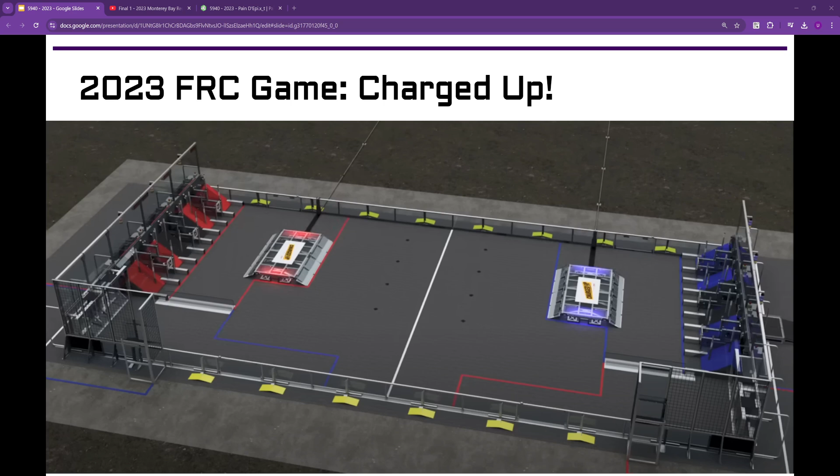Bread had one of the best robots of the year in this game. They are able to play the game in a lot of different ways. And so we'll watch a video, one of their matches, and then we'll look through all of the different mechanisms and see some of the unique ways they were doing things in this game. This is one of the final matches at one of their regionals. I think Bread's down here in the corner for the start for auton.

A little quieter. Yes, they're working with Madtown 1323 to be able to go get game pieces and get them back to the grid. They had an intake that largely for cones they were grabbing from the single feed station, and then able to very quickly extend out and get them onto the posts.

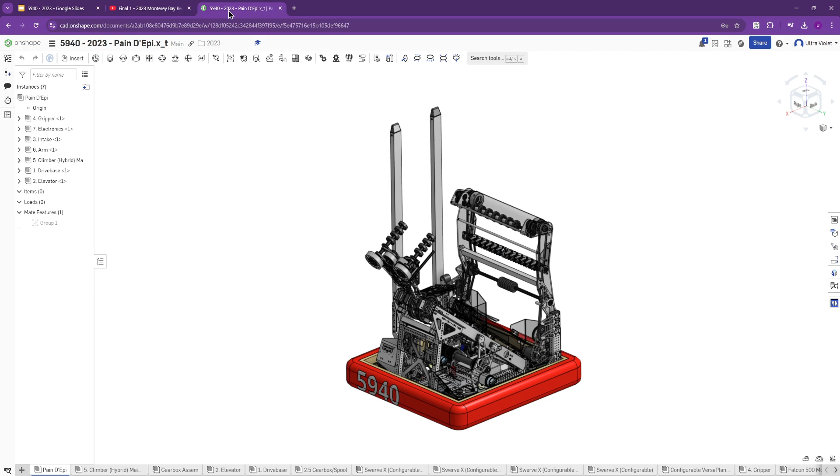So as we look through the robot, it's again going to have a somewhat standard look. And whenever we're coming in and looking at robots, we always kind of break down the mechanisms. They do it in a similar way to what we do. They have numbers and all their mechanisms and things. So they get the drive base here, which we don't have to go too much in detail. We're kind of standardizing in FRC now across drive bases.

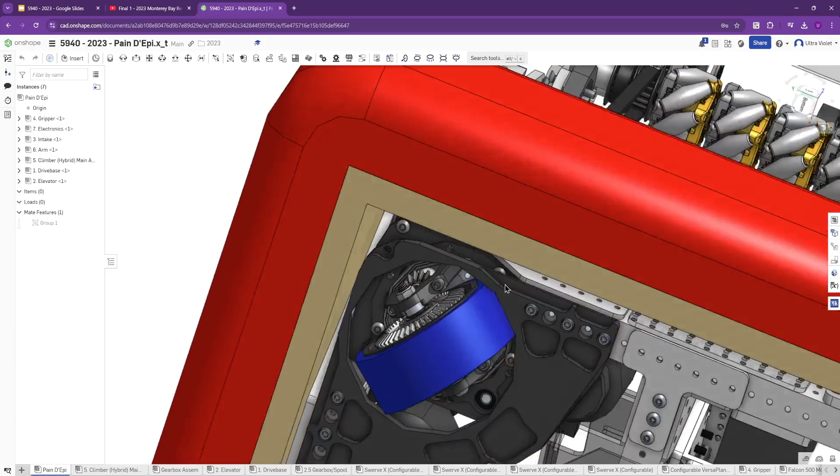There's a lot of little details and things, but for the most part, teams are going to have a rectangle or a square with the swerve modules mounted into the corners. Here they're using the West Coast Products Swerve X modules. So they have a little bit of a different base plate than the Swerve Drive Specialties ones. But for the most part, they're all doing about the same thing. They just do it in a little bit different way. So they have a belt here instead of a gear and a few other things.

But as you look through them, there's more this year than there ever have been in kinds of different types of modules, but it is useful to have an idea of what they are. So as we're scouting and looking at other robots, we know a little bit about what they're doing.

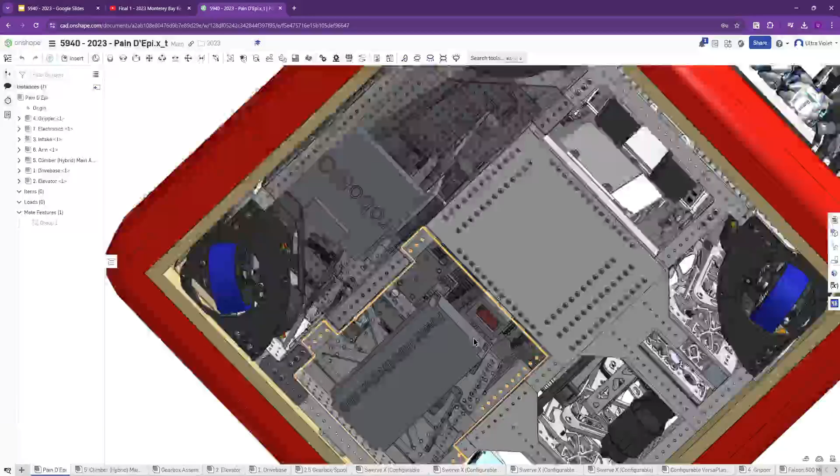The other part of their drivetrain, they do have some undermounted electronics. So we can see that they have some polycarb plates here that they have to take off if they need to get to their RoboRio or their power distribution hub. And that's all that's in CAD, but there may be some other things on the real robot. Whenever you have space like this, there's probably something tucked in there on the real robot that just never got into CAD. It's just room for extra small electronic things, switches like the Ethernet switches or power regulators or anything like that can fit down in there.

Their battery looks like it does mount in from the top, so it is sitting in here, and they have a little bar that the power leads have to go under so it doesn't end up hitting any of this stuff up here that's rotating. And then it gets plugged in here, so they actually have a little 3D printed block to hold the other end of the connector, it looks like.

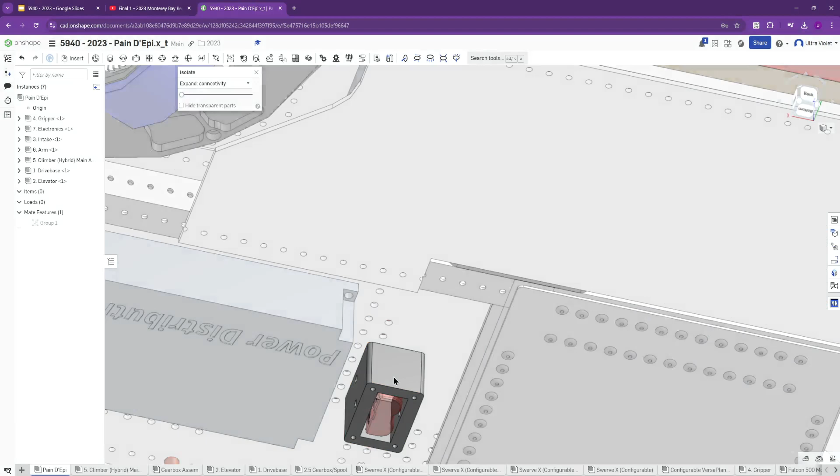So we can kind of see that here. So they have this block here that they're going to bolt through the other end of the connector, so it's stationary to the robot, and then they're just able to plug in on top of that.

And then they have a very short power path. They have the main breakers right here, PDH is right there. So they have very short main power runs, which is really good for efficiency. You're not wasting any of the battery power to resistance that's built into the wire. So you always want to keep that pretty short when possible, and have these three things all pretty close together.

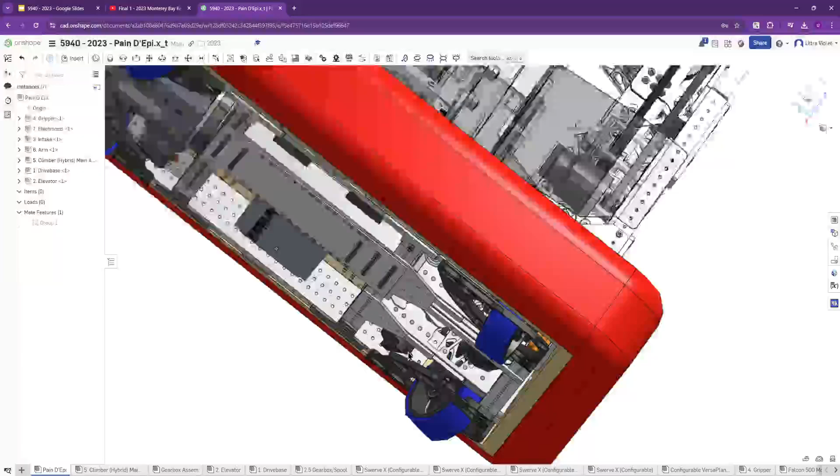Okay, the rest of the drivetrain chassis, we have a few different crossbars here. So you have the main ones that are supporting the main run of the robot, like the elevator mechanism. And then they have these ones out on the side here for the endgame fork climb, where they're able to support themselves on the side of the charge station.

So going up from there, they have that elevator. We'll look at the intake first, actually. Okay, so this was one of the more complicated intakes from this year. It's a slap down style intake, so it starts up and it just has one pivot joint, so it's pretty easy to build. You just have to pivot across this axis and bring it down to be able to go outside the frame perimeter to bring the cube into the robot.

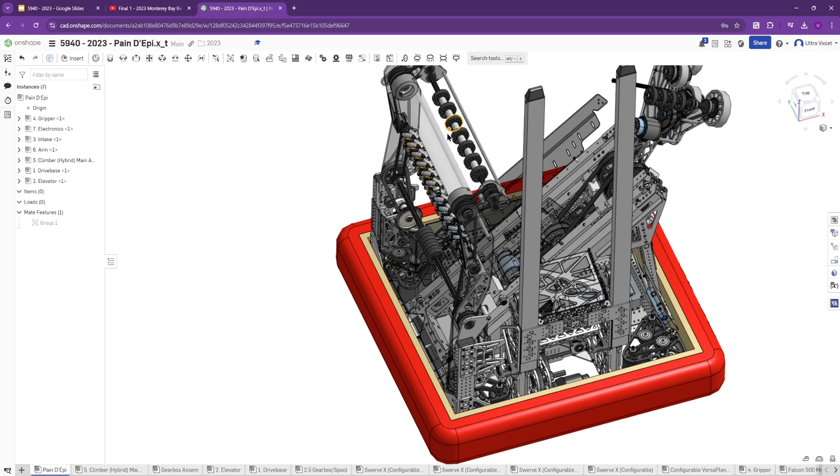But then you also have this extra roller up here, and that's what's used for the cones. So as this comes down for cubes, it's just going to move the cube in, have it hit the bumper. And then these are mecanum wheels. We've talked about them a little bit in a couple of videos this year, but not a ton.

Mecanum wheels are a type of omnidirectional wheel that has the rollers at 45 degrees. And what that lets us do is even though they're just spinning along one axis, like if you just had a normal wheel, they're always just going to push in one direction, it allows the object to be moved to the side as well.

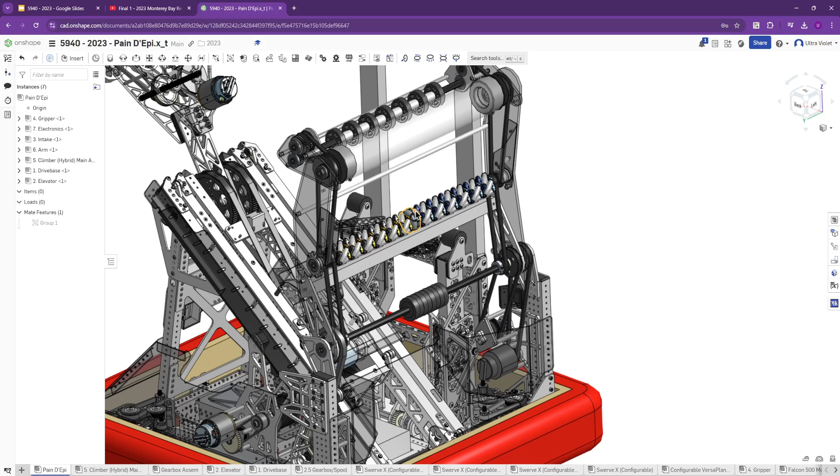So for cubes or balls or anything that can be compliant, as this is rotating and spinning in, the cube runs into these wedges here on the side, and it's contacting these wheels, and it allows it to very quickly slide over to the center and get pushed up with this wheel and this center omni wheel here, and get driven into the claw so it can actually be intaked and taken up to be scored on the higher levels.

So this gets used a good amount in different intakes. It allows you to vector the game piece into the center of the robot. So anytime we need to have a game piece in the center of the robot to score it more precisely, mecanum wheels or vectored intake wheels are always an option. We've run them on a few different past robots. 2014 is one of the first years anyone did, and we developed it and were able to use it for that large ball as well that year.

And then that's just going to go up, and they have to have everything in sync. So as they go into cube intake mode, this arm's going to fold back down, so they're in a certain state that the robot's going to be in to be able to bring that cube in, and then be able to flip it back out when they need to.

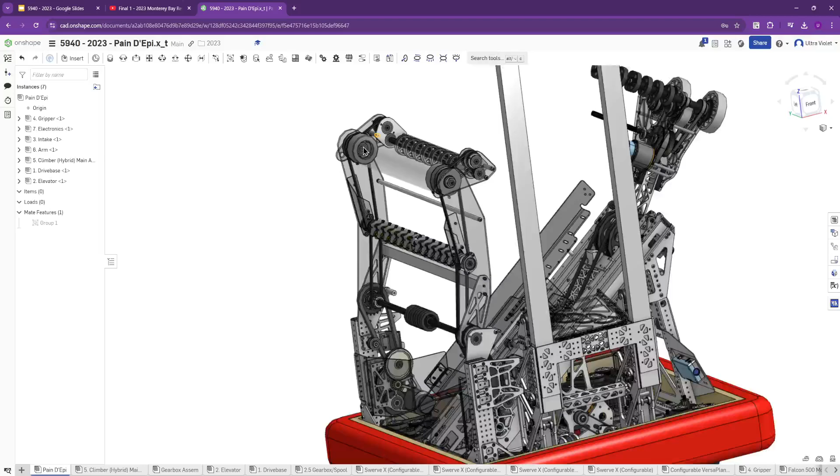For cones, they actually grab cones with them tipped pointing away from them. So the tip of the cone is going to be back over here, and the flange base of the cone is going to be up on the ground facing towards them. They bring this whole arm down, and the flange of the cone gets grabbed between these two rollers. And we can see the powertrain of this whole thing pretty quickly. It just keeps doing that.

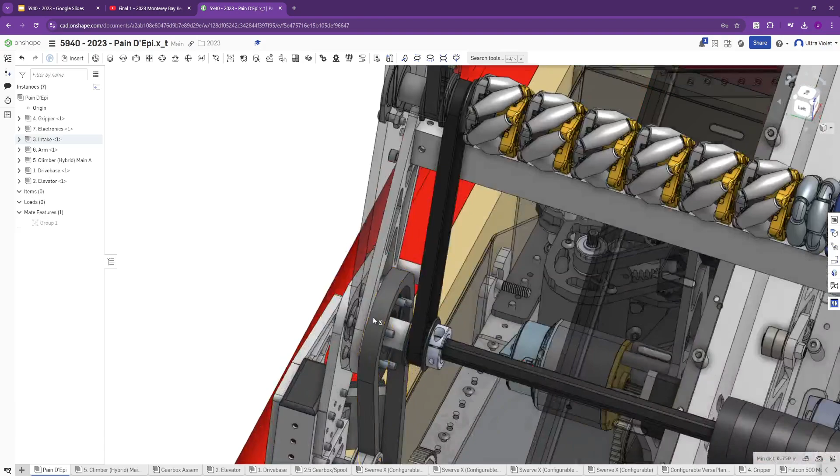Okay, so we have the gearbox here that is driving the actual pivot. And so this is what's pivoting the arm in and out. And then on, let's see if we can get that.

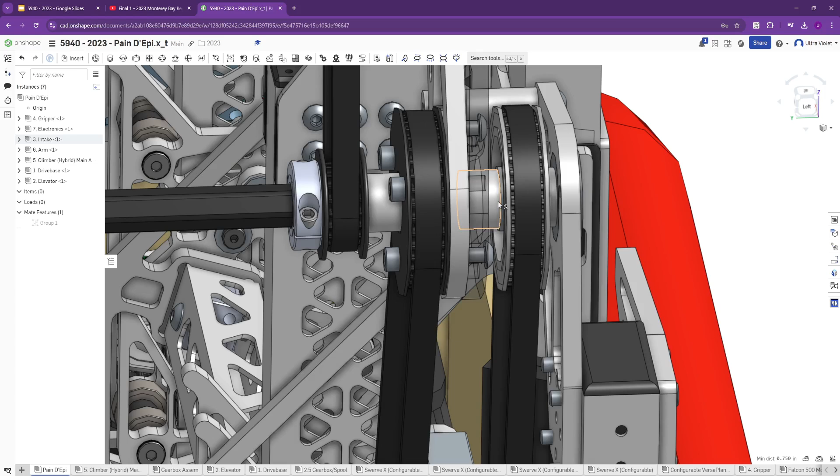Is driving to the shaft itself. And so this is what we call coaxial. So we have these two different belts and they're doing two different things. So this motor is driving the actual shaft and it's spinning these rollers, and then the belt up from here is going to spin this roller, and then they're going to do it again to spin this top roller.

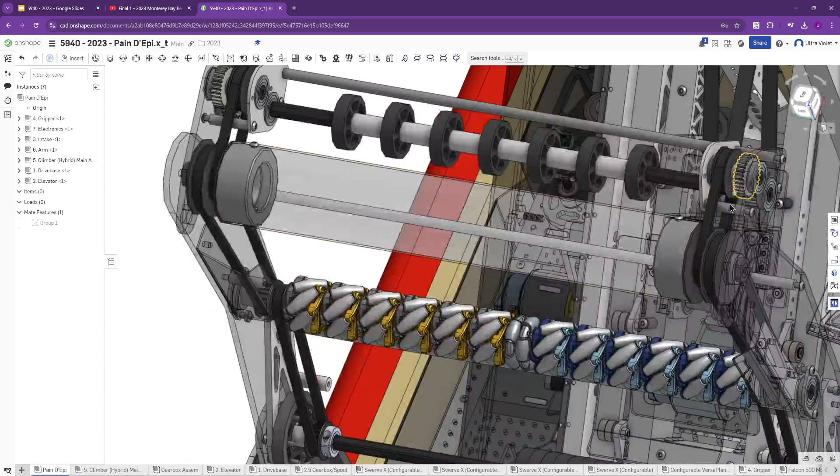And then we can see at the last part of that we have another belt and then some gears to be able to reverse the roller that have these small wheels on the end. Their final cone suck-in roller are getting reversed by those gears on both sides, so it's kind of redundant here. They're driving it from both sides. And we'll look at exactly why that's happening.

So the way it's coaxial though, because we didn't quite finish that, are these plates here and this pulley are all not actually mounted to the shaft. They're just mounted to bearings on the shaft. So if we hide some things, we can see that there's a bearing here. And that is what's actually allowing this whole thing to spin around the shaft.

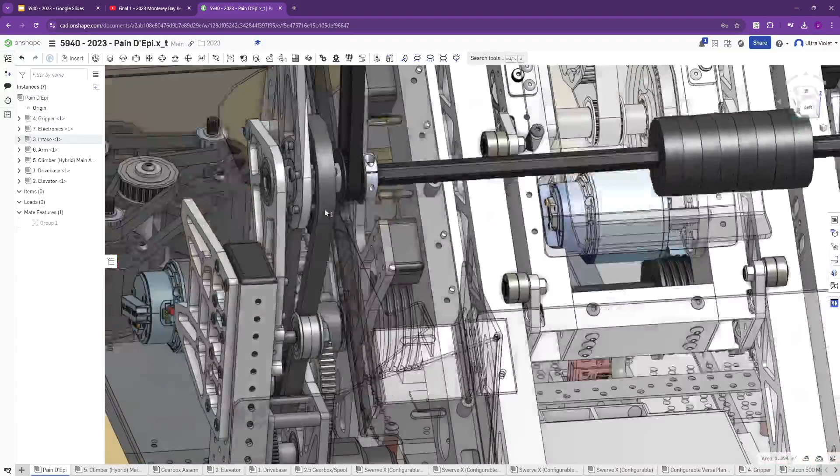Even if this hex shaft is spinning really fast for the intake, it doesn't change the position of the arm itself. And so that pulley that we hid is bolted directly to the arm. And that's what's giving that whole pivot system, having it work. Same thing down on that side. So it's really only pivoting from this side.

The motion down here doesn't seem like it's powered by anything. It's just giving it an encoder. So they have this CANcoder here. And so this is allowing them to get direct 1-to-1 gear ratio or pulley ratio or something close to that. Those look like the same size. And so that's giving them their feedback for where that arm is positioned and for what angle it is.

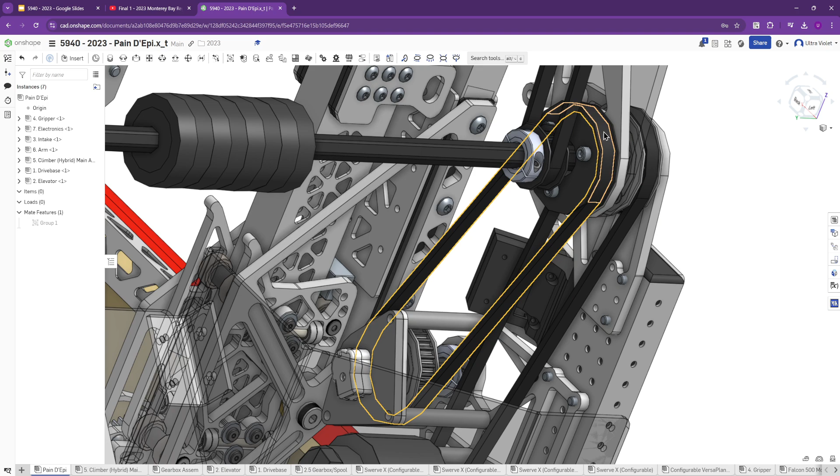So they're able to set that angle really precisely to make it the right height to intake cubes or cones. And make sure it's folded back into the robot at the start of the match or when they're driving around. And so the power is actually happening on this side, and that side's just for sensing.

Okay, so then that power transmission for the intake is pretty simple. It's just powering those different rollers for the cube. But for the cone, it's a little bit different. You can see this plate here where this whole roller mechanism with the gears and everything is mounted isn't actually attached directly to this plate at all. So this is again kind of free to rotate because it's mounted on a bearing.

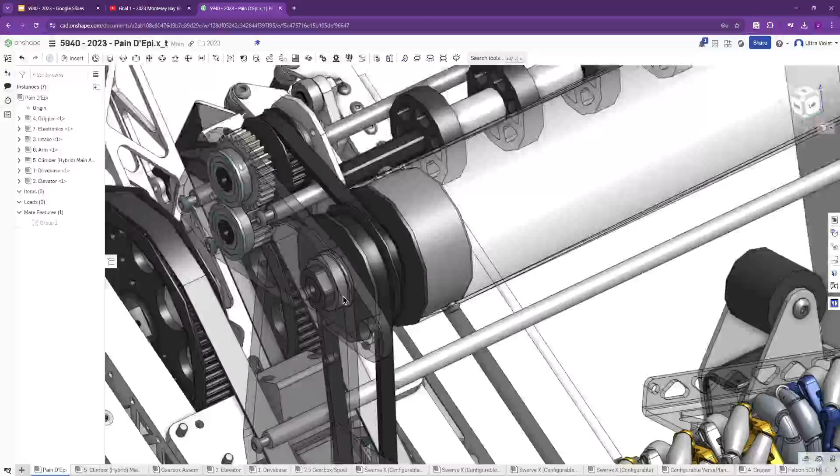We can see it come in here. So there's a hex bearing here that's able to spin. And so even though this shaft is spinning and this shaft is spinning, the plate itself can rotate around. I believe this hole here is for some amount of surgical tubing or something so it's tensioned down so that this is always pushed up into the right position when nothing is acting on it. So it'd be something here pulling down on this.

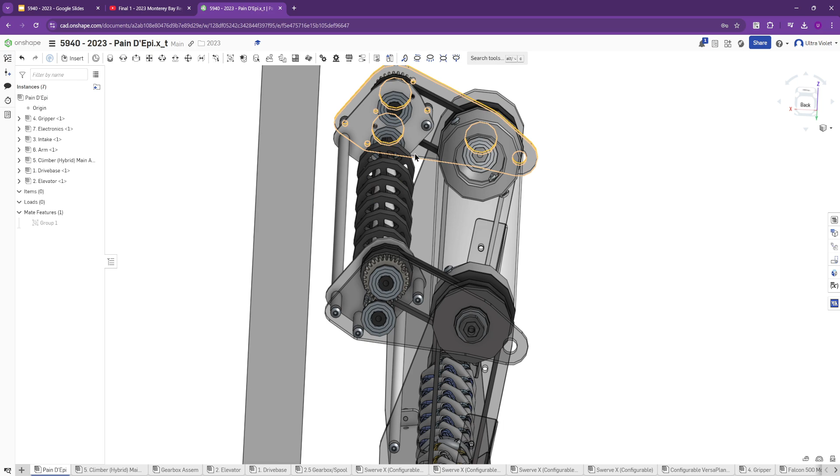But then as the cone gets sucked in, so this wheel's kind of turning this way, this roller's turning this way, and then these wheels are turning the opposite way because of that gear stack. It'll actually pull this whole mechanism down further so that the cone is able to get flipped upside down into their robot. If they didn't do that, when they went and intaked it, they would flip the cone over and then they would be upside down when they went to score it. And so that's not what they wanted to do.

So then they actually flip the whole cone and the flange basically is facing up towards the sky. And so then when they grab it with their arm mechanism over here, they flip it over again, and then it's ready to be scored, and the base is kind of pointing down, so it can actually go onto the pole.

And so they're able to get that almost extra actuation just from the rotation of this roller, and the ability for this to pivot a little bit around that shaft. They're able to get that extra motion on the cone without having to add another motor or have pneumatics or anything like that.

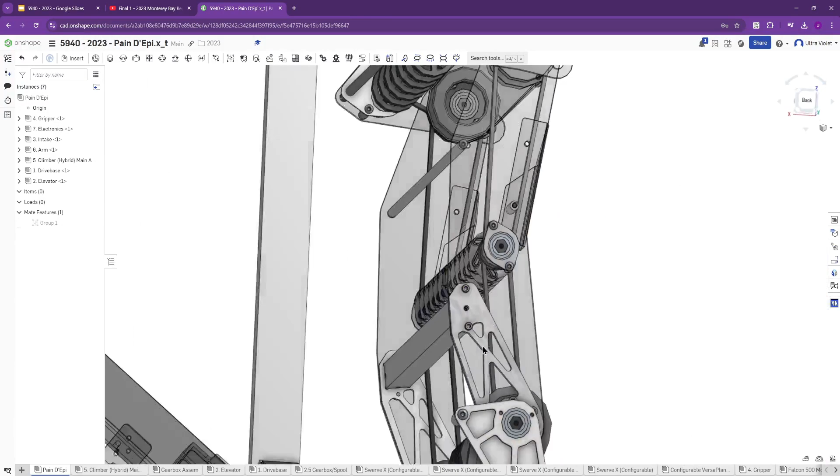The intake itself is polycarbonate towards the outside, so if it does take a hit, it's able to flex out here, but it's very rigid on the inside here, so it's basically able to transfer the torque and the motion across this 1/4 inch aluminum and this 1x1 tube. So it's okay that they're only powering it on this one side, because you have that rigid aluminum structure down here where it needs to be.

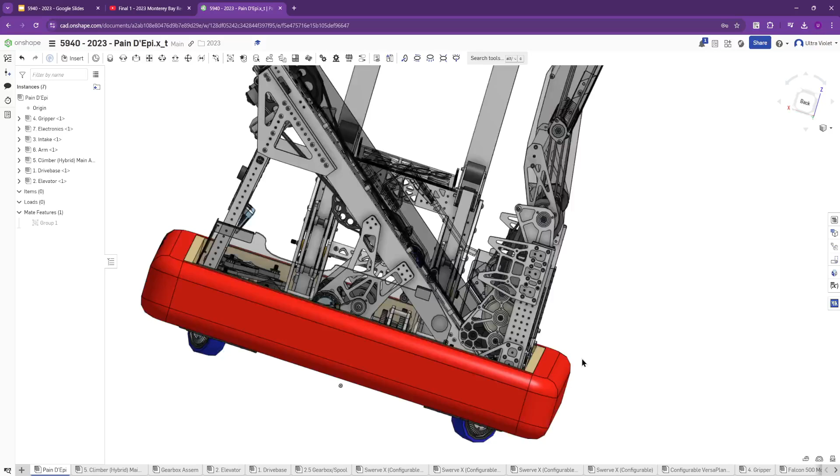And you're going to have this being able to stay pretty straight because it's going to be really hard to twist anything in here, where if you just had the polycarb, it might twist a little bit more. And since this is pretty short, that square tube, when it's folded out, doesn't stick very far past their bumper. So if anybody does run into the intake itself, it's able to be compliant, flex a little bit, and ideally not permanently bend or break.

And then they have a couple little guards to prevent the cubes from running into the belt too hard or getting pinched in some weird spot. So they added some bent polycarbonate here, just to prevent any of that. It also probably holds the belt on a little bit, so the belt can't pop off in any direction. And like we already briefly talked about, they did have a gearbox down here to do that pivot; it starts as a belt, then it gets up to gears, and then goes back to a chain here.

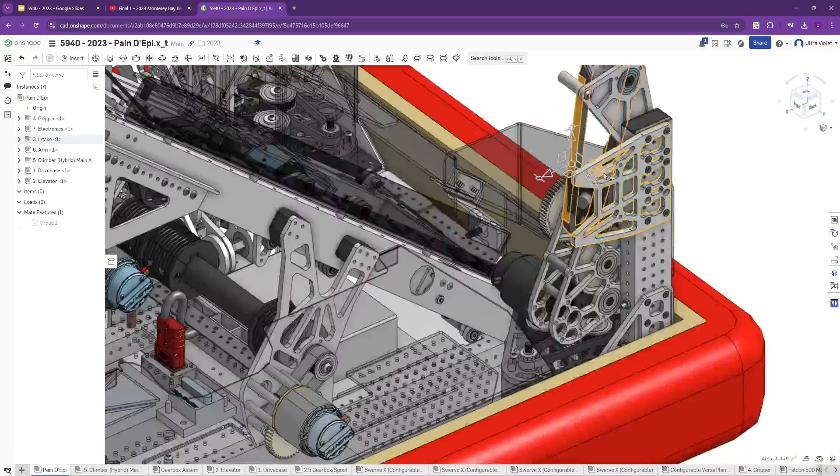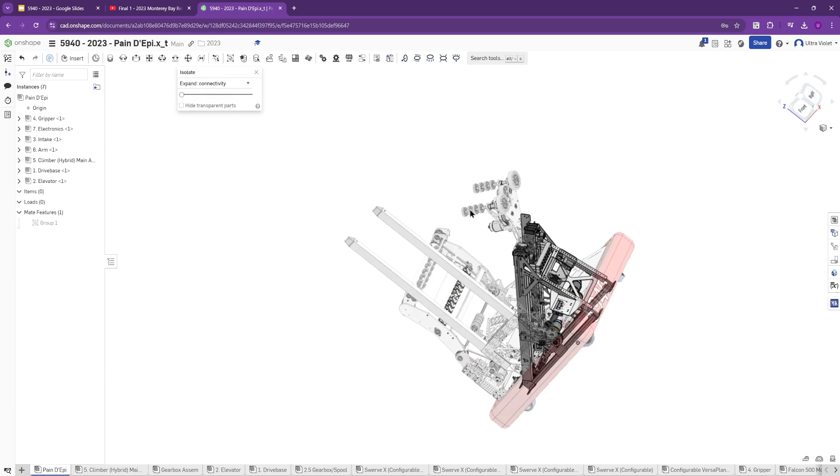Okay, so moving back to the elevator. Let's see if we can isolate that a little bit, so it makes it easier to see. So that elevator is mounted through the main crossbars in their chassis. There's a few different things that are a little bit interesting here. The carriage for the elevator, the inside stage that moves, isn't all the way down, so they can bring this even farther down, and there's not a lot of crossbars on this elevator holding it together.

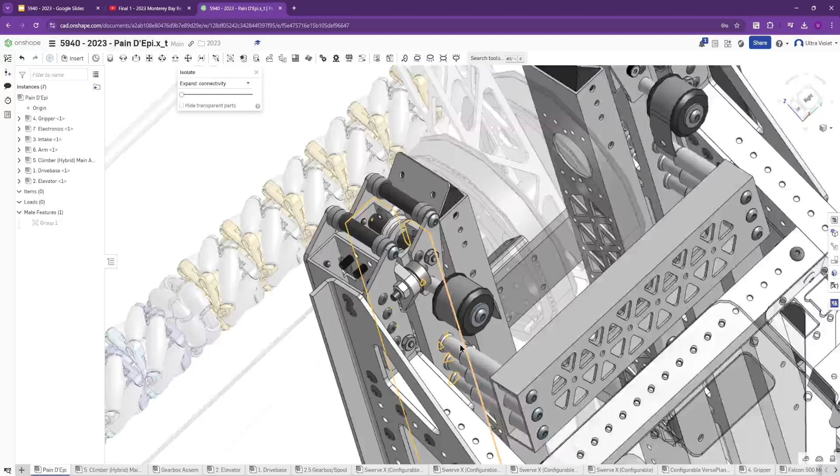They have this one lower one down here pushed back so it doesn't interfere with the pulley on the wrist mechanism that's able to flip the cubes and cones in and out. So it's just spacered off of here, and is done in a way that allows the bearings and everything to slip past it. So that's why you have these interesting shaped tubes. And they also did that to give it a little bit more strength.

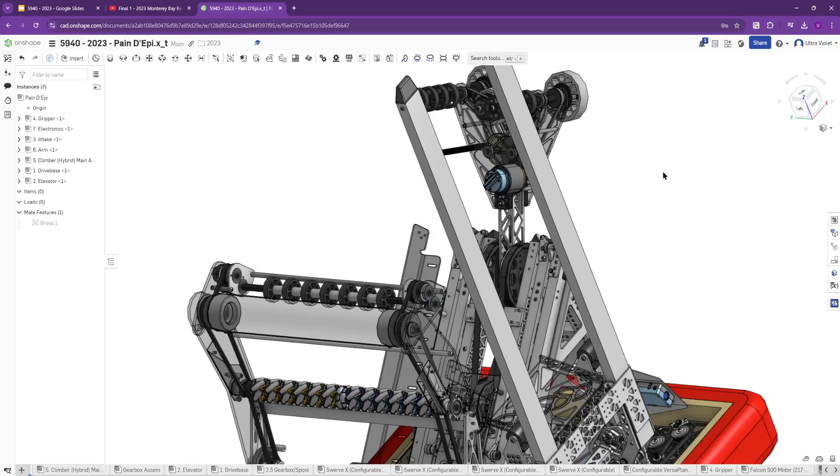It goes all the way through. If we make that transparent, we can see that this goes all the way through and then is bolted in to the outer face of this tube and the outer face of this tube on the inside here. And so that's going to be a lot stronger than if you just bolted it straight to this inside face. Let's see. I'll hide that polycarb panel real fast.

The elevator itself is using custom bearing blocks, it looks like. I don't think those are COTS in any way. But they are similar to some of the COTS ones, so they have the outside bearings riding on it, and then the dowel pin in here with the smaller bearings to ride on the inside faces. It does look like they did some cutouts in the tube, so they have some cutouts here for those interface bearings to go into.

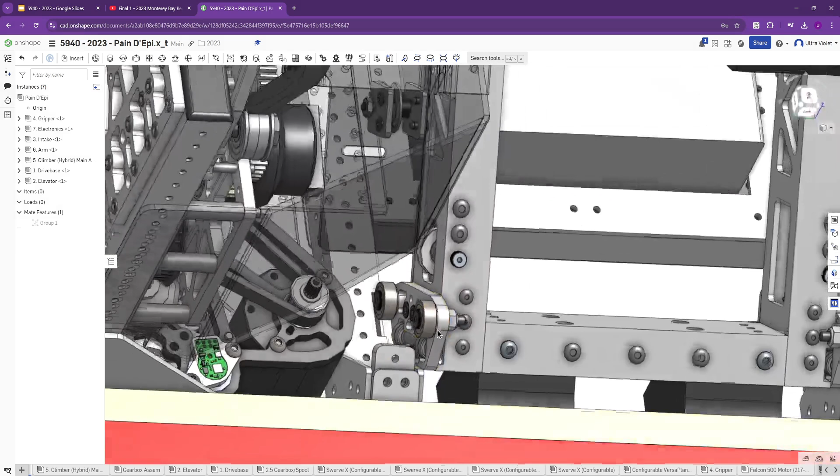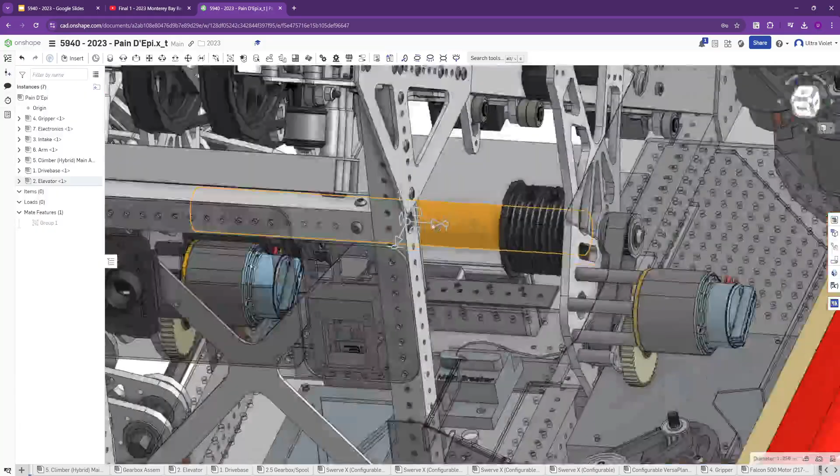Okay. All right, let's see if we can see the full motion package. So we have these two drums here. We have a motor on a gearbox that gets belted up to there. Or is there another one? Yeah, so then there's another one as well. So they have two motors powering this shaft and spool, which I believe are both mounted to the shaft, I think. Let's see if we can.

Yeah, so all of those are going to be on that shaft. And so they do it using a rather large aluminum tube. Let's see. But it is spinning on a bearing there. Oh, so that's in the plate. That would make sense.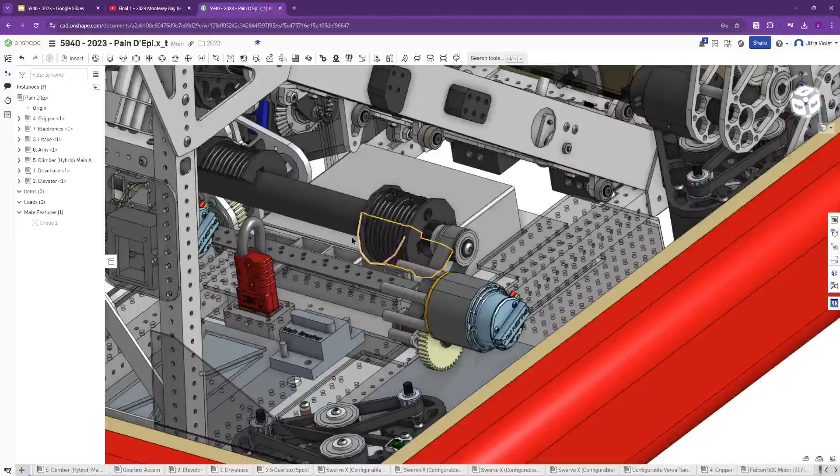So yeah, so then the tube itself here likely has some form of press-in hub on the outside there, so they're actually able to rotate it at the same time. I'm not sure we see it in CAD, but it may just not have been CAD'ed. Yeah, it doesn't look like it, but there's almost certainly something in here to transfer torque, right? This can't just be floating in the middle of the air here.

So we can go ahead and bring some of those plates back and parts. So that allows them to have this be a very strong tube. You're not gonna bend the hex shaft or anything, so you have the larger diameter aluminum tube on the outside. It gives them something to mount their printed spools to. So we have these printed spools here that look like they're bolted into the tube itself. At least that's what I think they're doing.

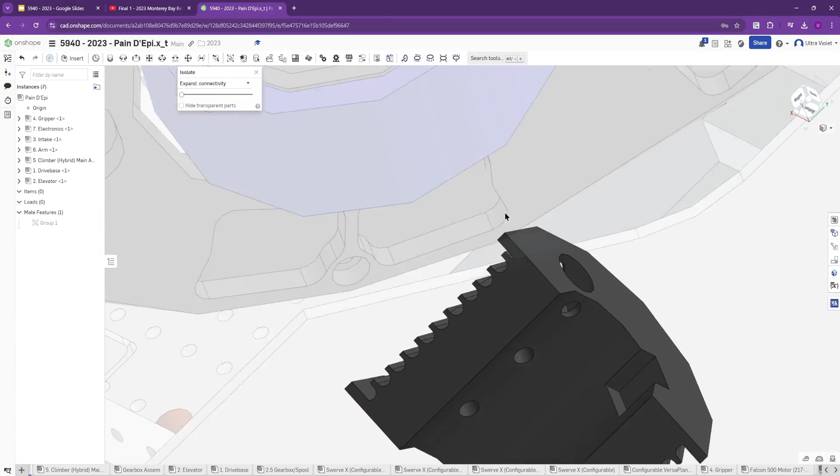Let's see, so we can kind of isolate that. Yeah, so it looks like you have a nut pocket there and potentially a bolt to go through it. I'm not entirely sure what that part is for. It may be for holding the string on. It may just be for how it's constructed.

You can see the other side is a little bit different. Yeah, the other side just has the through bore, so they're probably coming through and going back into that lower side. Yeah, they could be bolting through that. That could be for the string. And they're able to get that mounted. So these are all rotating together on that shaft the whole way through.

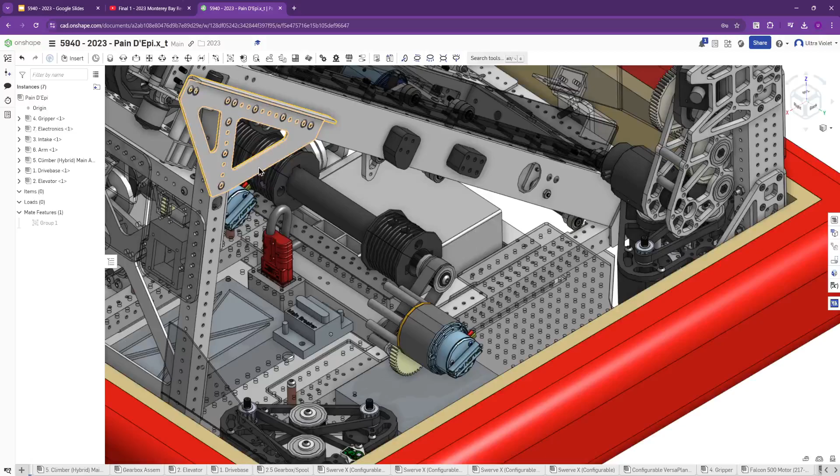All right. So with the string, they are using that to wind and unwind and actually lift the elevator. So you can kind of see where the pulleys and things are. They have them running inside of their tubes. So you have like a pulley here that the string's going to run around and go back up that elevator with. And since it's just a string, they're able to kind of redirect it.

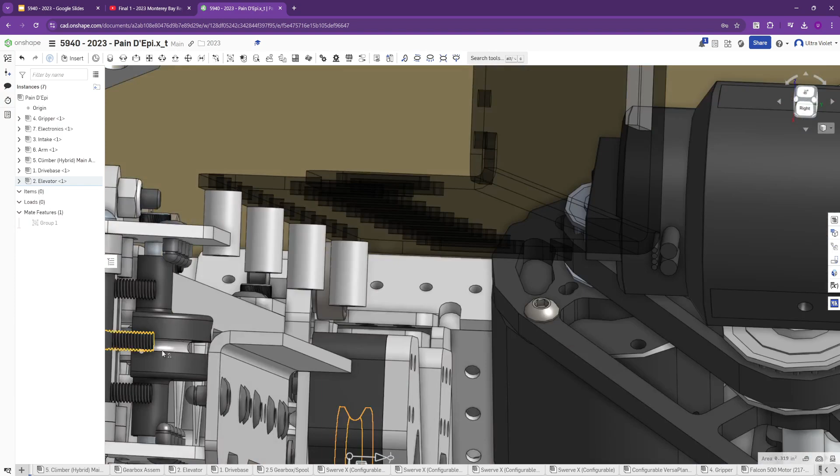So even though the spool is going this way, the string itself is going to start redirecting around this pulley right here, and then it's able to go down the whole system again to another pulley and come back up to this pulley up on top there, and then down again to be able to pull and push the carriage up and down that elevator.

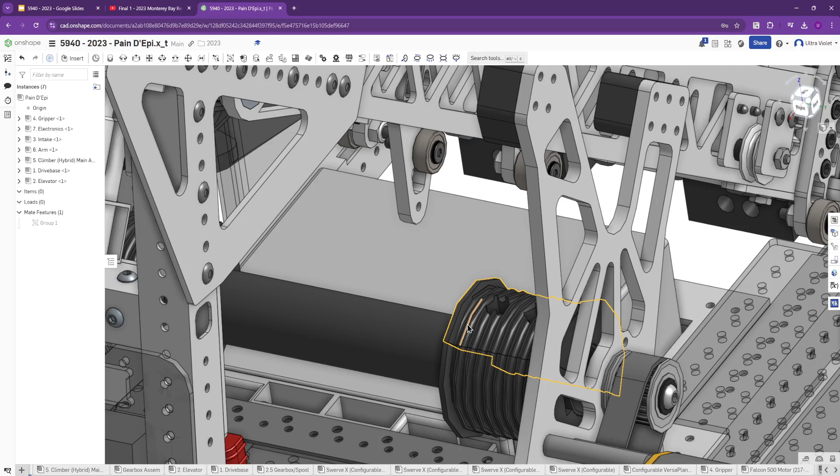So you do have to make sure, so they have like the windings in here that are printed in so that the spool should be able to be very even as it's going in and out. It shouldn't be wrapping on top of itself. You'd have to be careful with things like that because if it does wrap too big, then your pulley diameter is bigger. And so you don't actually know exactly where the elevator is. If for some reason it's wrapping too fast, you may be moving more than you think you are. And so you want to be careful with that when using string in an elevator.

Let's see. The tie point on the carriage should be down in here. Or did they do a full, is it a continuous string? It might be. I can't tell. So they have the pulley there. Somewhere they should tie it off to the carriage so they can actually pull it up and down. It doesn't look like it's going to be easy to see that.

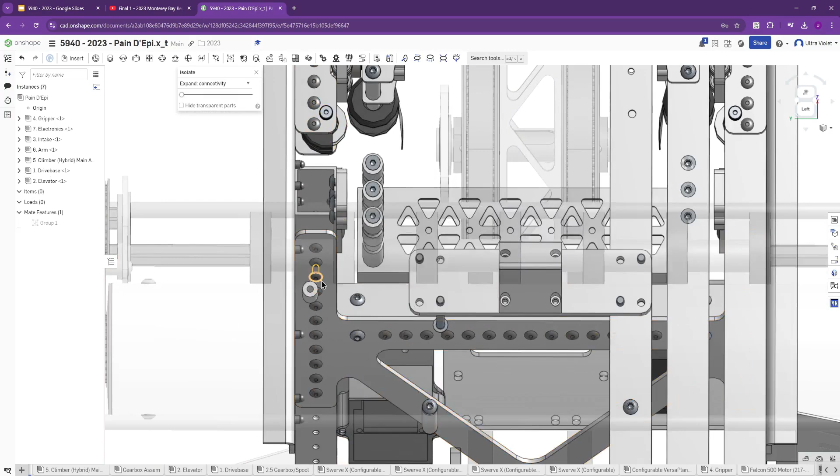Let's see. So on just the elevator, maybe we'll be able to see it a little bit better with the path of the pulley here. Let's see. So it's going up that one like we talked about. It's going to change direction there on this pulley. Let's see, it's probably farther down. Yep, so there's a down pulley that it's changing direction again and coming back up. And then it looks like that's going to have it come down. And it may just be going around that.

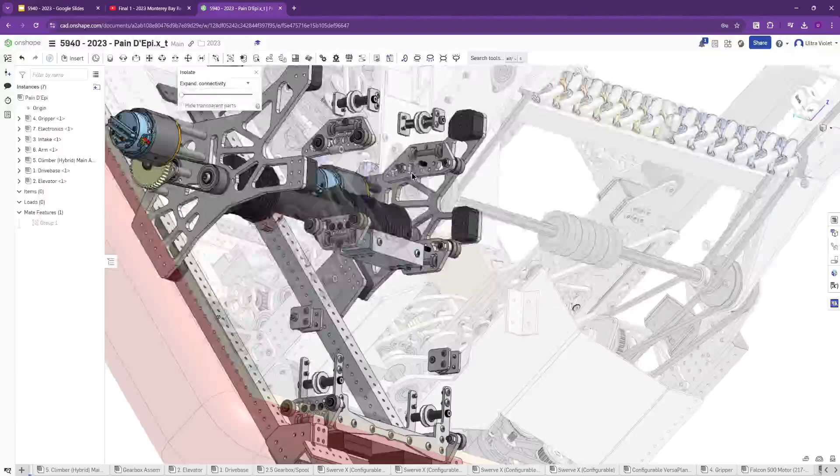Let's see. Yeah, I don't see anything else in the CAD that suggests why that would be there. And then I'm not entirely sure why the extra pulley is there either, or the extra spool down at the bottom. It may just be for how they're doing things.

It's possible that both of these spools are for pulling it out, and then they may have a central pull back. So this may be the pull down separate from the two that pull it out. That would be my guess, but I'm not sure how that would run if they do that. It may not be in CAD, or I may just not be seeing it.

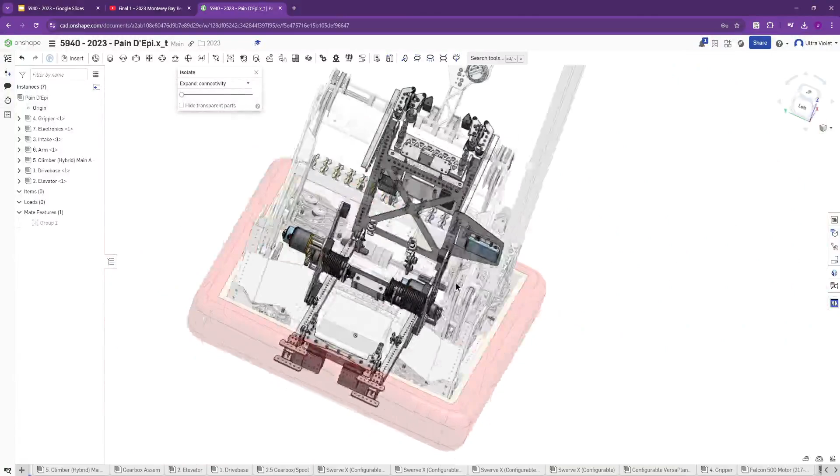So this would be a cascade elevator, or sorry, not a cascade, a continuous elevator. I said the wrong word, because you have that one string going all the way through the stages, at least on the up pull. Let's try to get some of our elevator back in place. Okay.

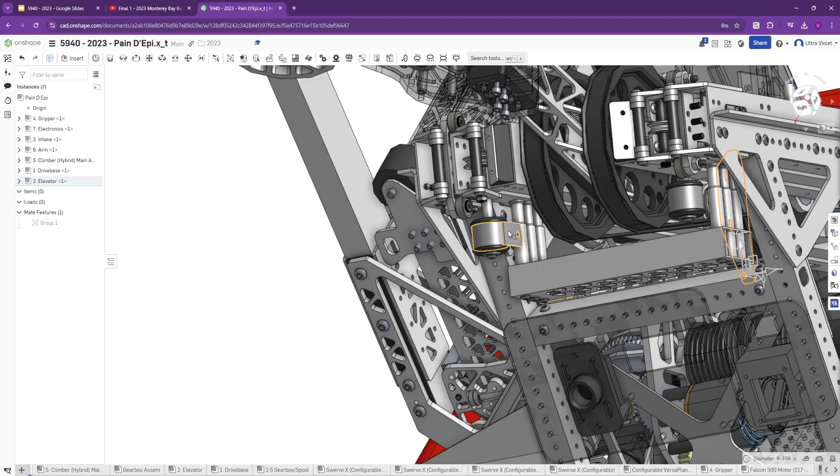And then the other part of the elevator that they use, they have these constant force springs that are helping assist the lift, so the motors aren't having to do all of it. These springs get tied down, likely down into here. Yeah, so this bolt point here is likely for that constant force spring. So it's always trying to be extended. So it's helping pull against gravity, and so the motor has to do less work since the spring is always trying to feed it up.

So that allows you to have a more precise system, and just use a little less battery power to actually raise your lift. And then when you go to power it back down, it's a little bit more controlled because you don't have gravity trying to shove it down the entire way.

In the carriage itself, they built in the mechanism to actually power their wrist. So we have this little cover here to make sure that the cones and cubes don't go into this power part of it, I imagine. So they're able to have something rest right here. We can go ahead and hide that so we can see that power transmission part.

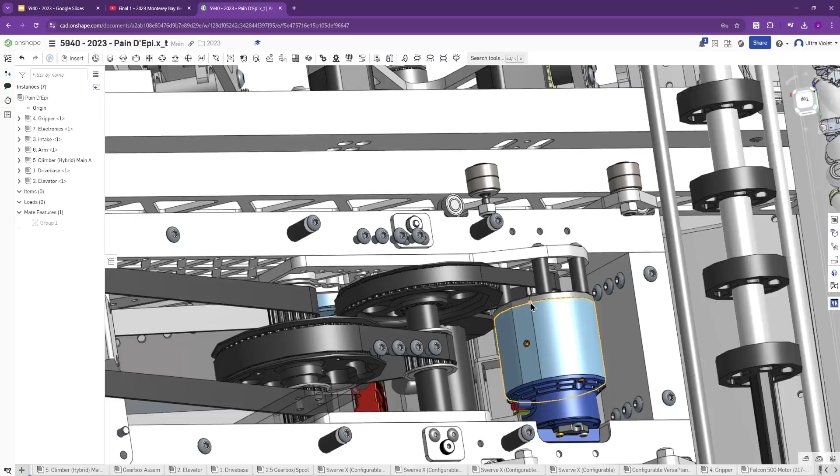All right. And so they have compound sets of belts and pulleys. So they have a motor here with a pinion on it to a bigger pulley. I imagine that's printed. Yeah, so it's probably printed, so it has a steel or aluminum insert into it. And so that's able to go on the hex shaft that's here, and then they have this larger printed pulley with some weight reduction or strength as well, so you get those walls printed around there.

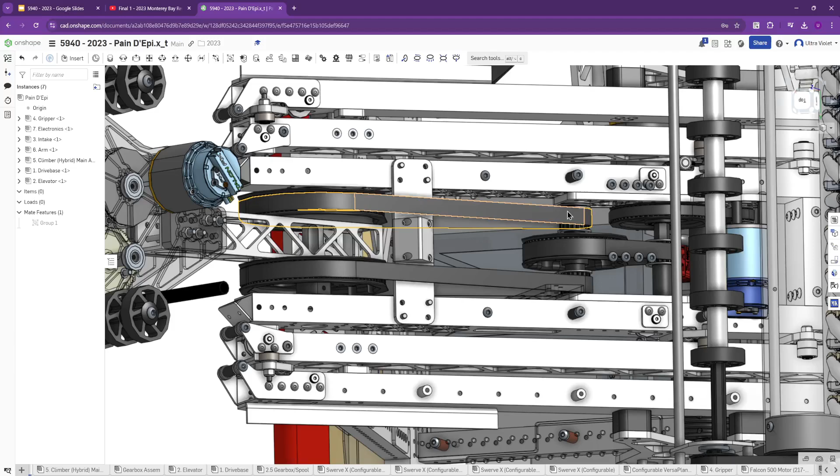And then again to another pulley and another pulley set to get some more reduction. And then double pulleys up here at the top to mount the actual arm. And if everything is printed, you can do this. If they're not printed, it depends on whether these pulleys are actually keyed together at the hex shaft.

Depending on how they actually put the hex into the part, you won't have them keyed off anything. So then the hex and the pulley teeth themselves won't align between pulley and pulley, even if they're the same size, and you can end up having a place where the teeth won't actually mesh correctly when you have two on the same thing. When you print them, you don't have that problem.

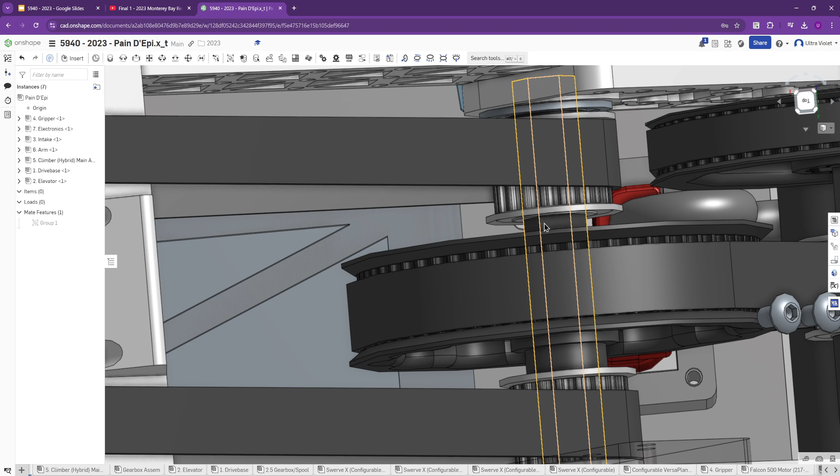And a lot of the manufacturers of COTS over the last 4 or 5 years have started manufacturing them in a way where they are keyed, and they'll have a little notch on them, so you can know which side is actually going to be the same across two pulleys. So you can put that same notch on the same face or the same corner of the hex shaft, and that allows you to line them up and make sure the whole system's going to work properly.

So anytime you have two chains or two belts, or even two gears going from one shaft to the same other shaft, you do have to take into account whether they are all going to be the same with that hex bore on the inside. It is a little bit easier now because more manufacturers have started doing that.

Before, you used to just have to buy a bunch of the pulleys and try to find ones that were close enough, or the same with the gears, and that was not the most ideal way to do it. And again, if you're printing your own, it's pretty easy to get those to line up since you're all printing them from the same file.

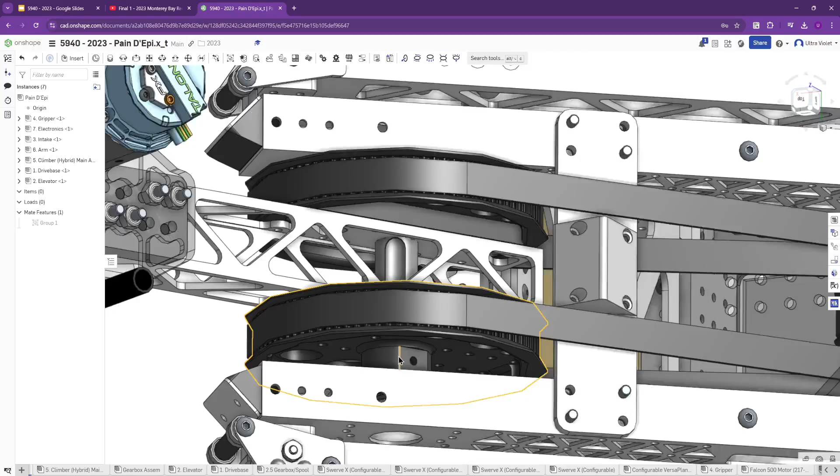Okay. The wrist tube itself, they went ahead and lightened quite heavily, so there's not a lot of material left in here. They cut out quite a lot of it to make this really light. And then up here, it's a pretty simple intake mechanism.

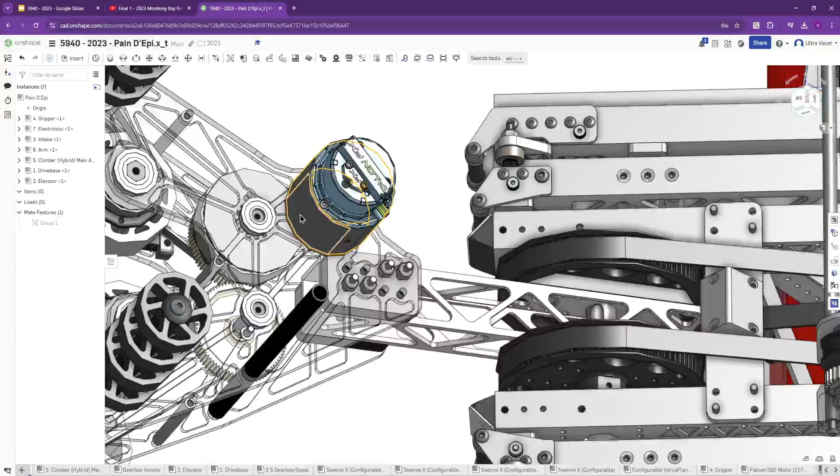This sort of Y gripper is used a decent amount. This is sort of any of the horizontal intakes, or hug intake, or however you want to call it. So it's grabbing the sides of the game piece. They use a motor and a belt to start it, and then they have two gears here to do the reversing of direction. And then it's just belted out to each of their wheel sets to actually get power here.

So they have the inner wheels here that are going to pinch the cone really hard. And then they have these small wheels up here that are basically designed to grab the cube. And then these outer wheels are mostly for centering either the cube or the cone as it's coming in. So if the cone hits off at a side, it's able to get sucked into the middle here relatively easy. Or if the cube got hit weird, it could also get bounced into the middle and then get grabbed up by these correctly.

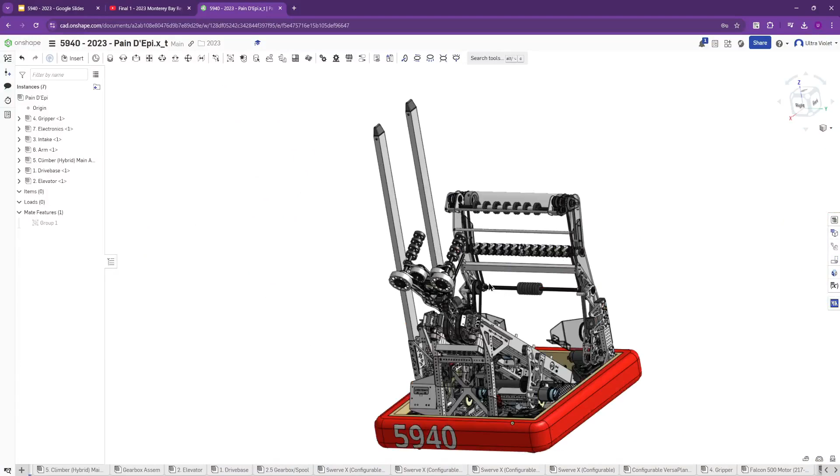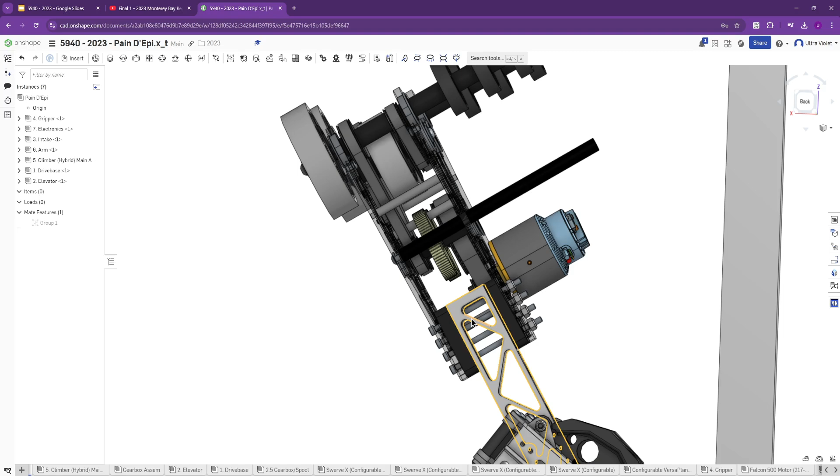I think that's the majority of the elevator. This mechanism doesn't have to be all that strong. It should never be hit by any other robot, right? It is an intake, but it's pretty much only leaving their frame perimeter when they're in those two protected zones, either in their loading zone area, or if they were in their scoring zones, is where you're going to have those game pieces, or you're going to have that deployed and actually being used.

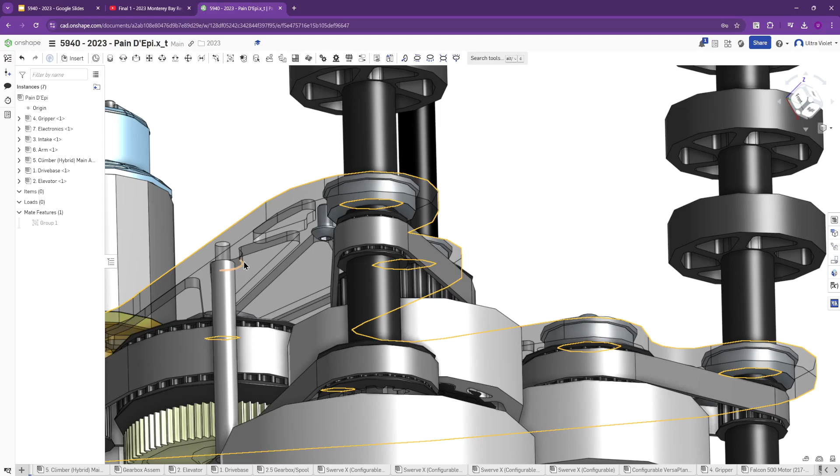It is all just polycarbonate here, it looks like, with basically live axle everywhere. So they just have the hex shaft spinning in bearings on those plates all throughout this setup. And then they did even go out and make it even lighter, so they did pocket the insides here. So all of these are cut throughs to just a thin area up on top or bottom to make it even lighter as they were moving that, so then they can move it super fast.

If this whole mechanism is pretty light, you have less mass that you're actually moving. And also there's just a lot going on this robot, so they probably just needed to get down on weight as well. And so they were taking out weight anywhere they could to make sure they could be under the weight limit.

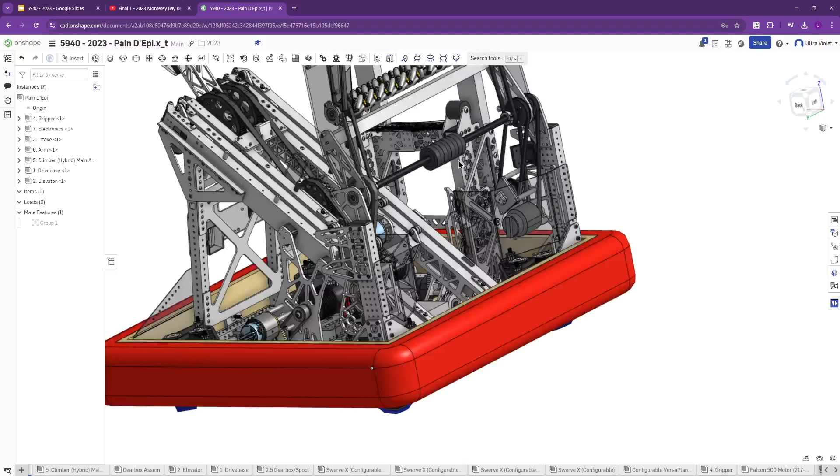Okay, I don't think I missed anything before we start going into the system. So I believe they have a few of these different cameras that are for localization as well, likely running PhotonVision or something similar. And then they also have, let's see what we can do, there's a Limelight here. I think it's mounted upside down in CAD, but that's fine. That I believe they were using to detect the cone positions and things when they were going to actually score. And so they were able to use vision to automate a lot of their robot processes.

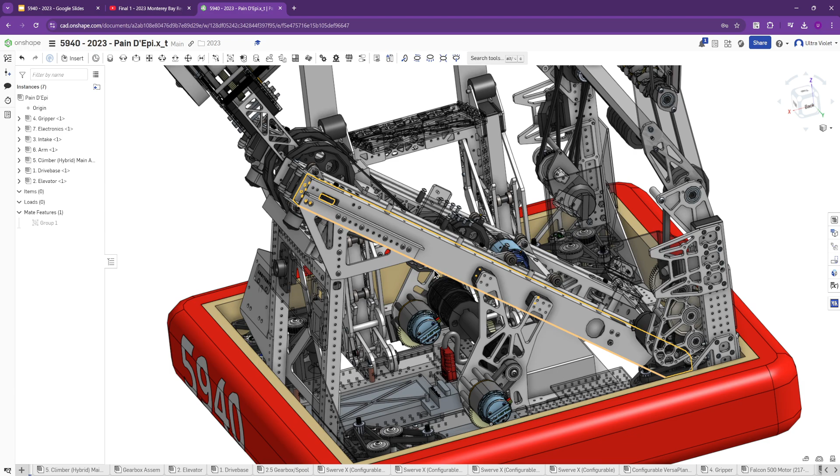It was basically what everybody was doing that year to try to make it as easy as possible to score cubes and cones on that grid without having to have the drive team align it perfectly every time, because it was a relatively small scoring box, especially for the cone, getting it onto that pole. You did have to be pretty precise, so getting it there quickly and using some automated sensors for that was really useful in 2023.

All right, so I'm going to hide the drive base real fast so we can kind of see into here. So this is their climber fork mechanism. There were a few other teams that had a similar style forks. The idea being that if you could have a heavy enough robot out far enough at the edge of your fork, they would have more leverage.

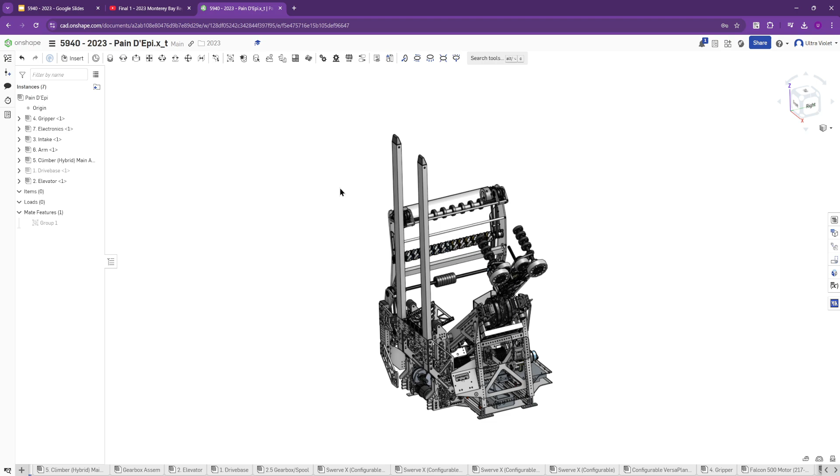So as you lift it up, either raised vertically or kind of tilted, or in this case for bread, they actually end up doing a little bit of both. You get your robot fully off the ground, and that was all you had to do to be counted as on the charge station. And then you had a lot more room for your other two partners to be there if your robot was hanging all the way off the edge.

It did take a little bit of time, but there were some times where it was faster because the other two people could be already balanced and you could drive in. And so it did work out for some teams, but it definitely wasn't necessary to be able to win matches or anything this year.

Okay, so let's see what they were doing to actually be able to power this mechanism. So they have a Falcon going into a VersaPlanetary. So this is giving them some amount of reduction here, anywhere up to 10-to-1 reduction in just this small planetary,

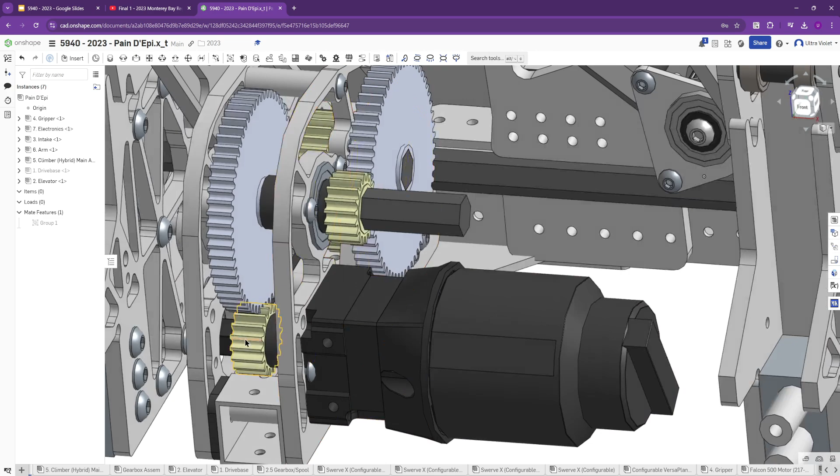to a few more gears, because this whole mechanism is going to have to lift their robot. So it needs to be geared down quite a bit to have enough torque, where it's not spinning that fast, but it has a lot of force to be able to actually pull their whole robot up. And so they have the gear going to here.

There should be, yeah, so the gear goes from the motor to this large one, the small one on the outside to another large one, and then we get, what's the easiest way to see into there? There's a lot of robot in the way. Okay, I'm gonna hide that gear, and that should let us do it.

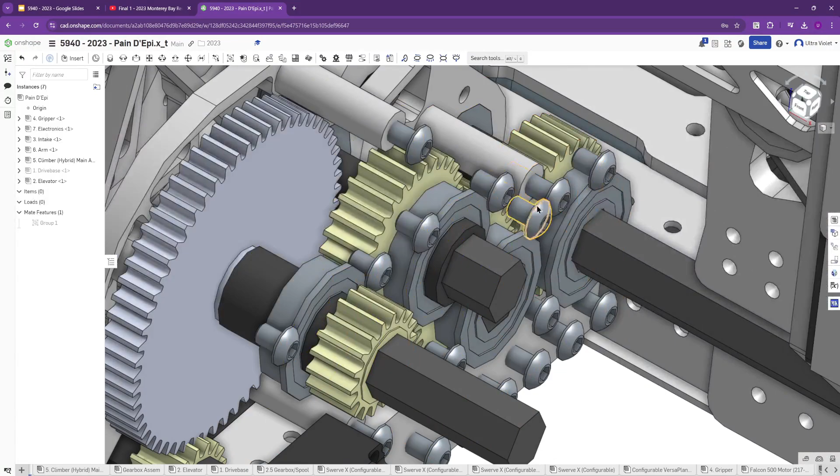All right, that's enough-ish. So then there's gear into gear, and then this hex shaft is your main driving source to output that power to both sides of your fork mechanism. And so this ends up being a sort of a version of an elevator or a climber, right? So what it's really doing is pulling down on

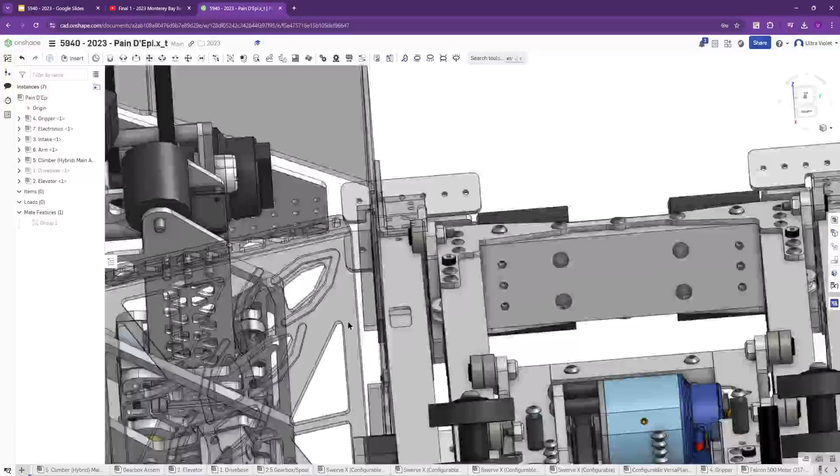some string, most likely. So if we're looking here, actually there is, that's part of the cam, but I don't think that's the only thing powering it. It might be. Let me see if we can get a little bit further into this. Hide that. Okay. Let's see. I don't know why I keep zooming out.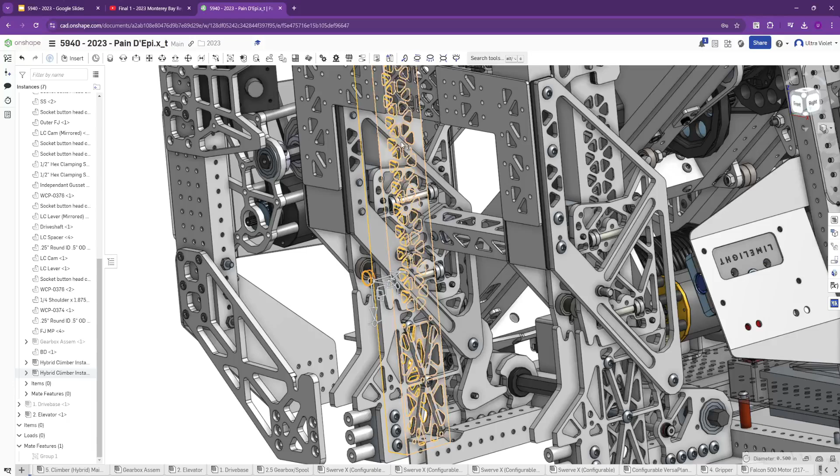This block up here is for a constant force spring, I believe, to pull up on this whole sled. So you have the bearings here and in here on the side. So as this whole sled goes up, that's how they're able to get high enough to be on top of the charge station. So you can kind of see it here. They have all of these bearings riding on these tubes. And so that whole mechanism is able to go up.

The trick is how it all comes back down. And so it looks like that's just part of the release here. So at the start, this is kind of turned on and holding this in place so that this can't flip out. And so as this rotates, this is able to spring around and this gets pulled up and folds out. So this whole part is going to go that direction. So it's pivoting around this large shoulder bolt right here, is what it looks like.

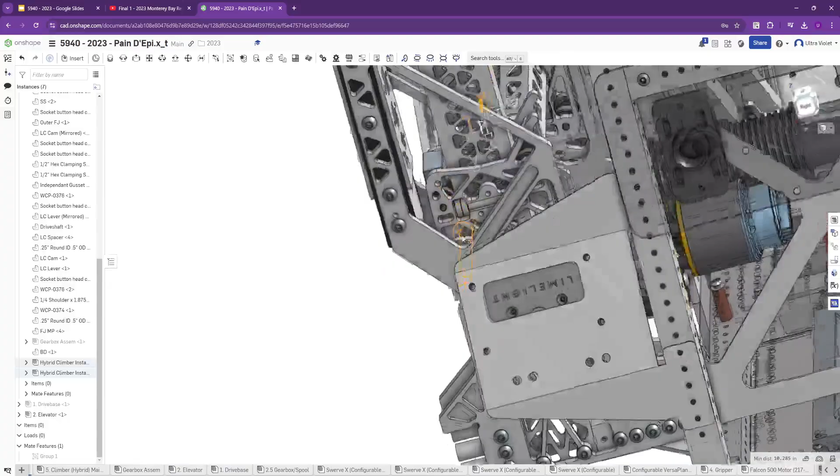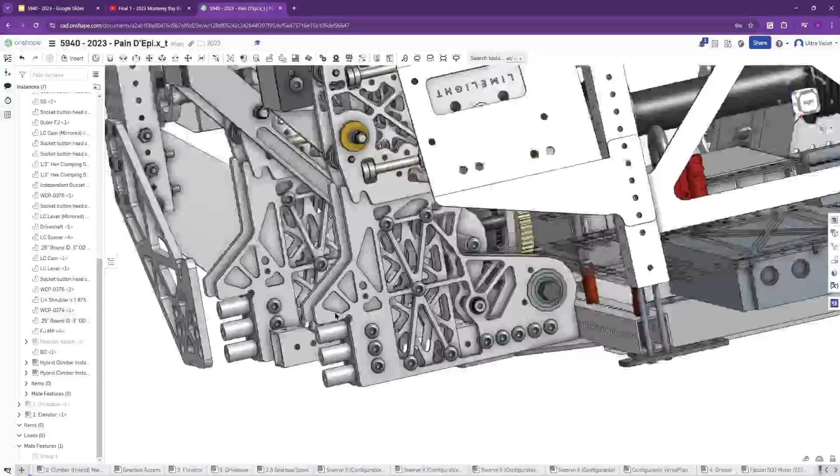Let's see. So as it does that, that's going to come out. The whole thing can rise. And then somewhere in there, I believe it's going to run into something else, but I'm not entirely sure where. That's what I think happens, because somehow they get that little angle tilt at the end as well. So you can kind of see the latch here and what it's latching onto. This comes out, and then that can go up and extend.

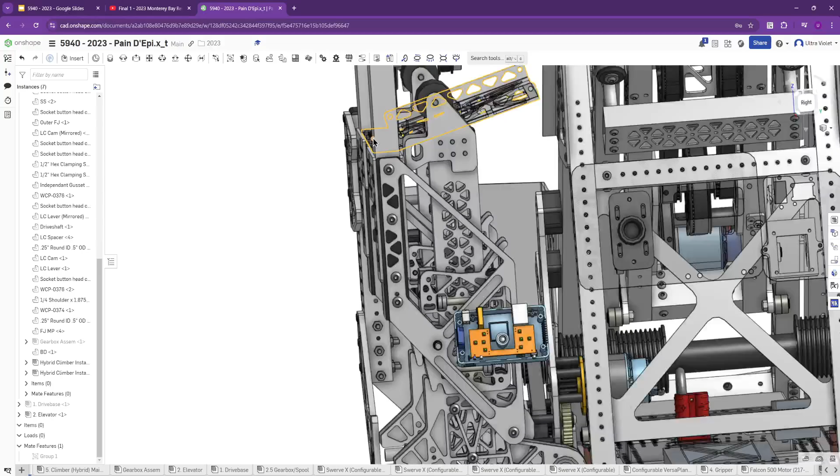Let's see if we can. Oh, well, that's the whole internals of a Limelight. All right, that didn't help me much. How does it do that? So, okay, does that come all the way back over? It might. I'm not entirely sure how the cam portion works. So somehow as it's pulling down, it also tilts them up a little bit. I'm not sure if we're seeing it in CAD or I'm just missing it. I might just be missing it.

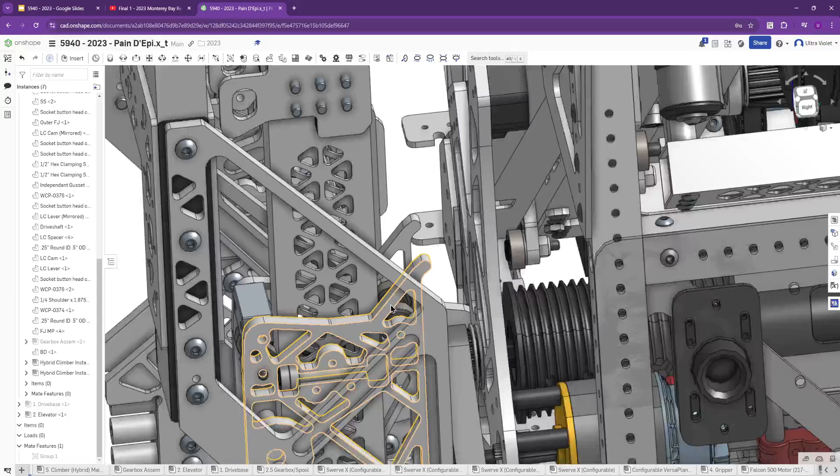This is not a native Onshape file, so we can't rotate things and actually move it around as easily. That would likely help for some of this. My guess is it might have to do with the shape, but that's part of the moving part. So that's going to go and get kind of caught there. So when that pivots off that point, this rod gets caught into the back of this point, I believe. So I think that's why it's cut out like that. That's going to nest there. So I believe that's what happens.

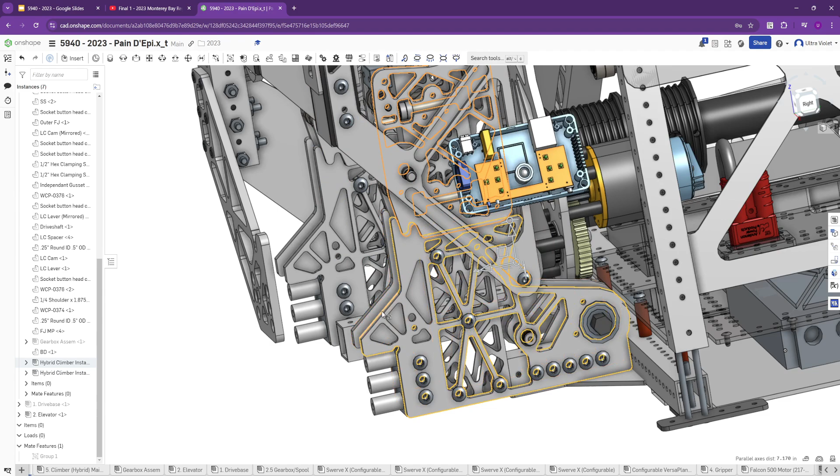It may just be here. So as they're pulling down to be able to have this come further down, this may just ride across this side bit here, but I'm not sure. Because if this is coming vertically, that would basically push the robot out and up. So that may be what's happening.

So I think this might just be riding down this slope so that as they pull fully with that gearbox and they basically just pull down on a string, it's basically level until this part that's folded out runs into this wedge, and then the back edge, this farther side of the robot, is going to tip up into the air because you're assuming this is going to stay flat on that platform since it's being held down by their partner robot.

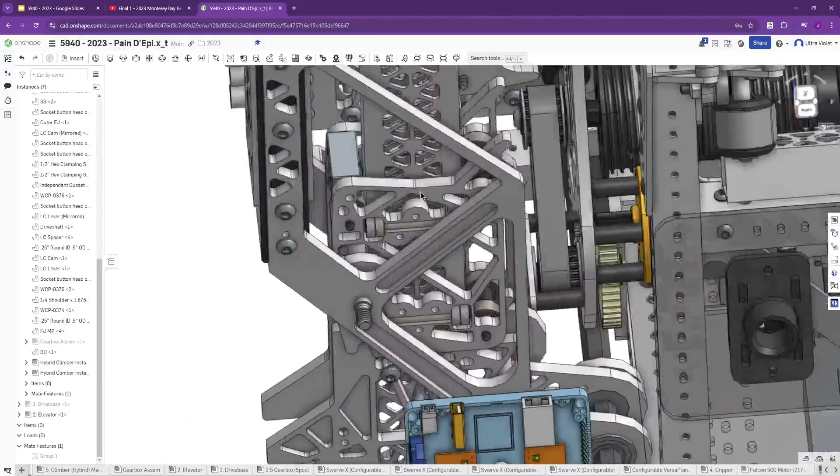That's my best guess as to what's happening in this one. I don't see any other way that it could happen, but I may just be missing what's going on there. It doesn't look like anything else quite runs into it or is going to be able to give it that angle. That's going to change that robot, kind of change its lean anywhere.

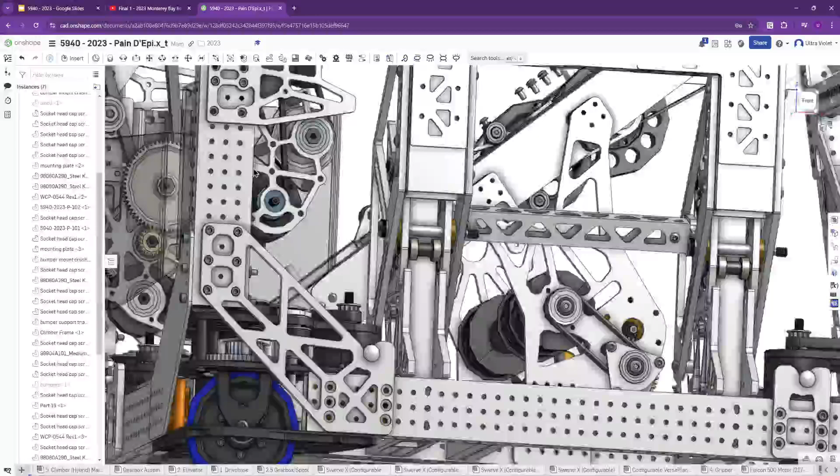Okay, we can go ahead and put the drivetrain back in. I'm going to hide, can I hide bumpers? Maybe, there we go. Okay, and so on their actual frame, we can see their bumper mounts, so they have them kind of built in to some of their intake supports here. They have aluminum plates that mount to the frame here and hold up these 2x1s over their swerve modules.

So instead of having the sort of mounting rail, mezzanine rail, or anything like that going all the way across, because it's harder to do with this swerve module in particular. It kind of runs out into the sides a little bit more. So they're able to build in this same sort of bumper mounting that 971 started in 2019, and then several teams have done since then.

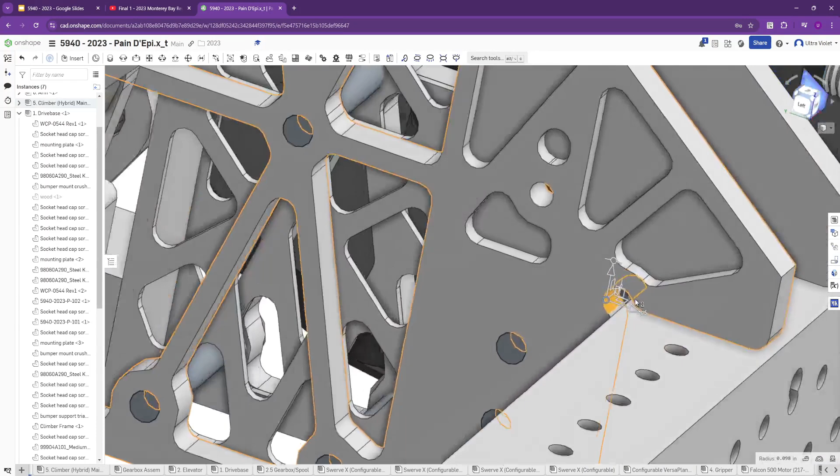And so those plates get machined, and as you set the whole bumper assembly in, you just tighten up this nut here on each one of these corners, and you get secured bumpers that way. You can see they did some nice cutout thing. Oop, that went a little too far. So this round out here is a dog bone or overcut. So they overcut a little bit to where you can fit that whole square corner into those edges.

So this plate gets a little bit supported by the top as well, not just the crossbars here or anything. They're able to do a little bit more there for it, and they make these blocks that are able to tap the bolts into. So I'm guessing these are probably aluminum to be able to hold the entire robot up. And so they probably just milled these to be able to support this whole plate and mount it into that frame rail.

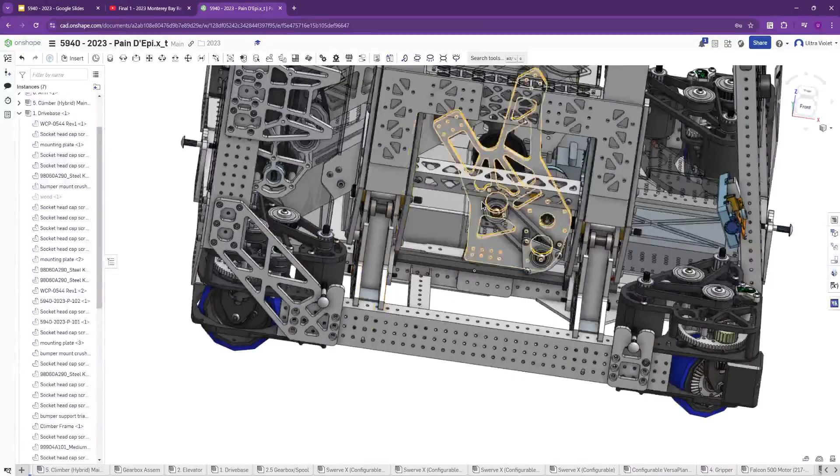Their forks themselves, we didn't really talk about. Those are just pieces of 2x1, relatively simple, with some angled ends to help them get under their partner robots. So this is just 16th wall aluminum tube, so nothing too special there. So as long as the team they're driving under had an inch of ground clearance and a relatively solid belly pan, they're able to slide these under and then lift themselves up onto the edge of that platform.

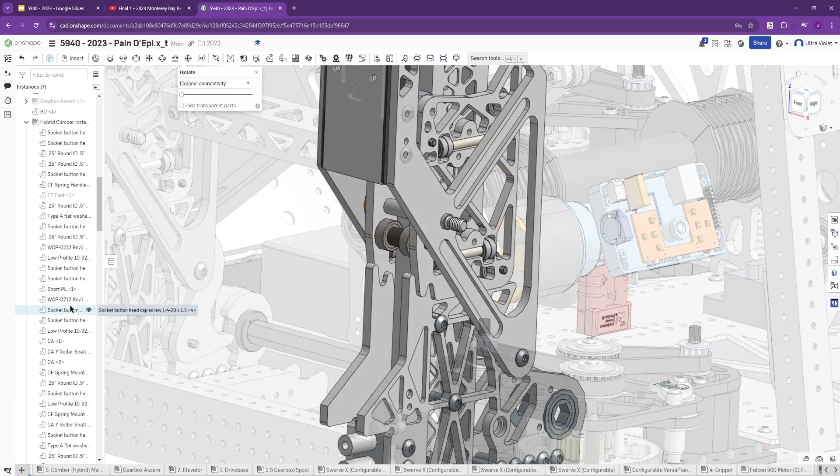What did we not see? Can I? Okay, it doesn't look like they sub-assembled anything else past that. Yeah, so you can't quite see any of the places where there's no specific call out for like a tied down string or anything. But it could have been anywhere in there.

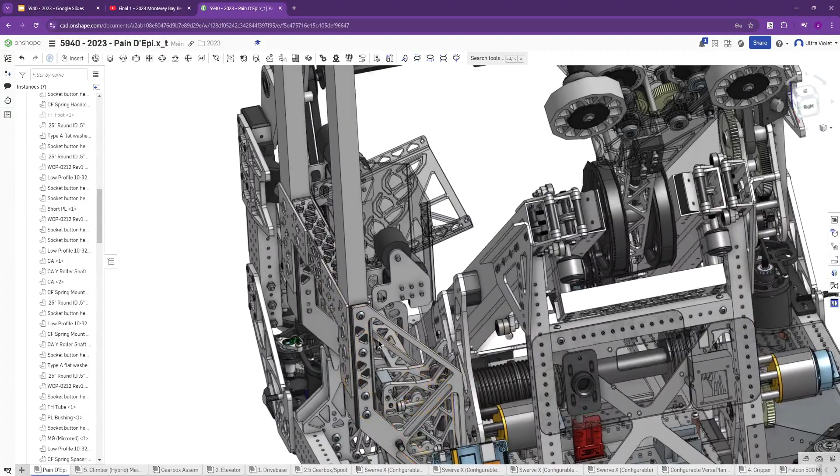But yeah, so they have quite a few milled aluminum plates to be able to get all of that geometry, to get all of those bearings into that mechanism. And quite a bit of the robot is done that way. But as you are building up things that have to lift the entire robot, things do get a little bit thicker and a little bit stronger, just so they're not flexing under the weight of 140, 150 pounds as it's starting to move around. Okay, I think that finishes it up for today.